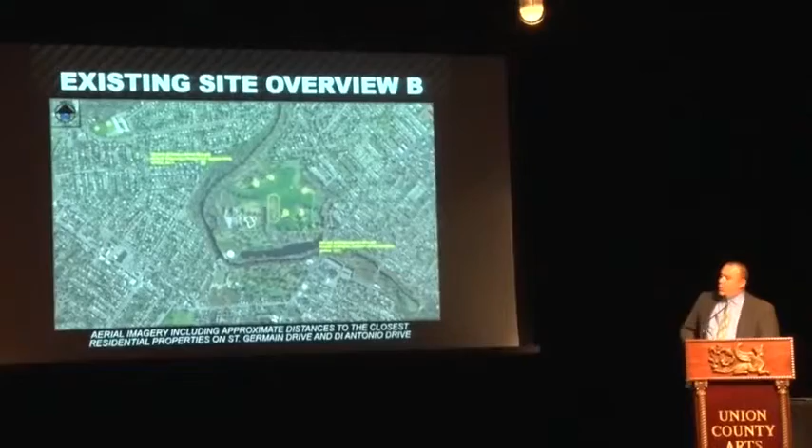Now that we have a general overview of the surroundings of the park, I'd like to take a closer look at the existing park and the amenities that we currently have at this park.

You'll see our track and field—the track is in red, or pinkish color—with the soccer field and track amenities within the interior of the field. To the north and east, we have a number of baseball and softball diamonds that are utilized. Those fields all have their associated fencing and other required measures, like backstops and fence material.

Now located to the south of our complex, we have a picnic area. To the southwest is the Walter E. Ulrich Pool, which consists of a kiddie pool, an Olympic-sized pool, and a diving pool, along with associated buildings such as the bathhouse with concessions, and the various pump houses and maintenance buildings. That particular complex is surrounded by a chain link fence.

Then to the west of our property, we have 4 tennis courts, which again are fenced in. Those tennis courts have recreation lighting so they can be utilized during evening hours, with poles 60 feet in height. To the west of the tennis courts, we also have some basketball courts.

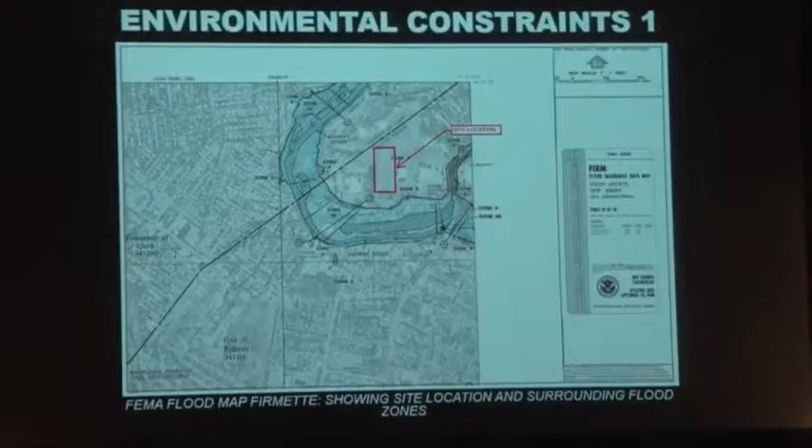One of the first items we look at is whether the site, especially in this case because we have the Rahway River, is located within a flood hazard area or flood-prone area. One of the documents the DEP has us utilize is the FEMA maps, which you'll see here. The blue shaded areas show the floodway, the flood hazard area, and all those limits. Our tract is the red box, and as you can see from this map, our site is outside of the flood hazard area.

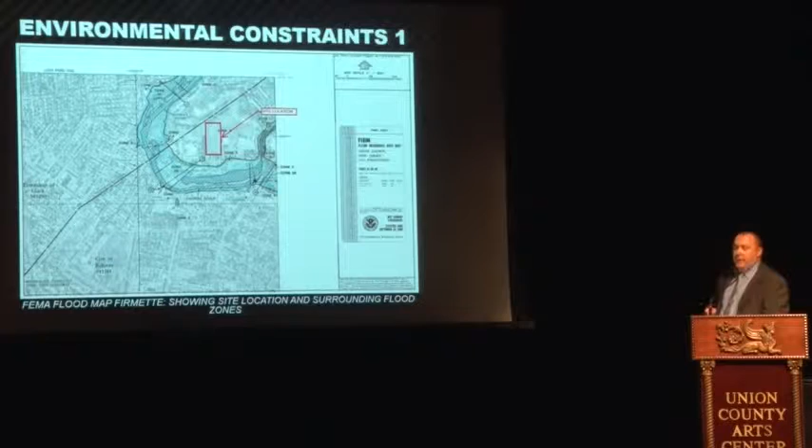Since that's the case, there are no NJDEP land use permitting requirements related to the flood hazard area for the project. So that's one element we did not need to take into consideration for our project, while there are other measures we need to look into as well.

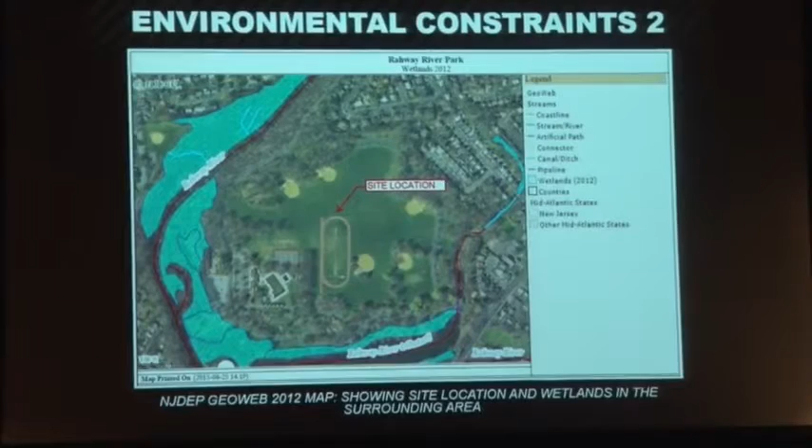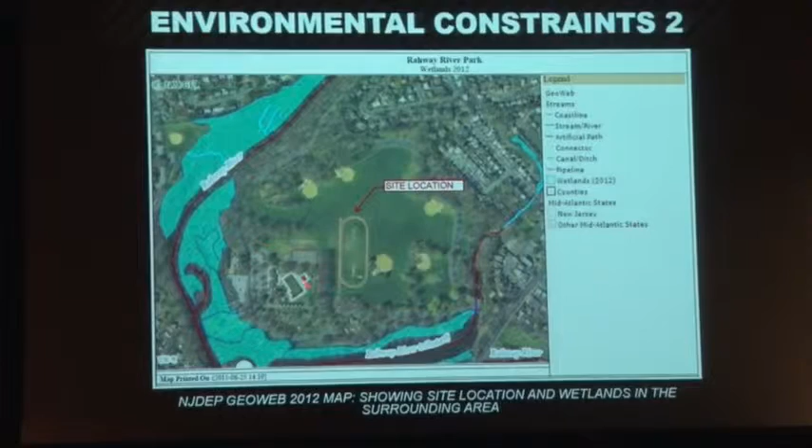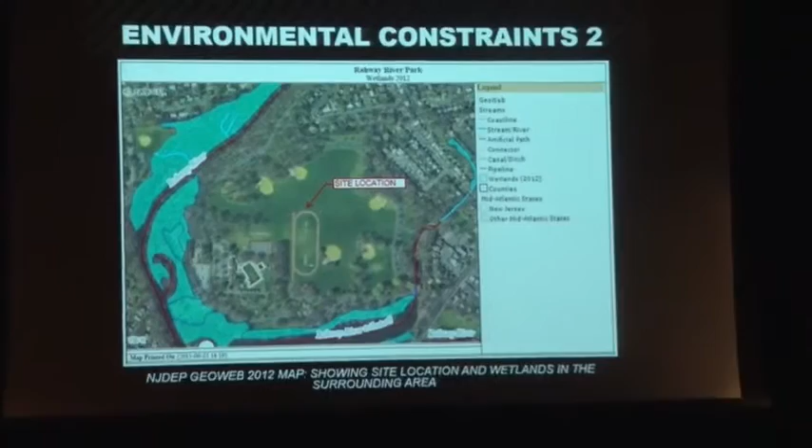The next item is related to wetlands and any associated buffers related to those wetlands. A document readily available to the public, as well as us engineers, is provided by the NJDEP, called the GeoWeb program. On that program, we're able to pick up the wetlands information, shown here in blue. Our tract is located here in the middle, and there are no wetlands associated with those particular improvements.

So again, nothing related to wetlands, so we are not required to obtain any of the wetlands permitting that would potentially be required if we were down in one of the areas near the river. As far as the site itself, we are outside the flood hazard area and also the wetlands. I'd just like to note, for the existing surroundings, the field is one of the higher locations within the park complex.

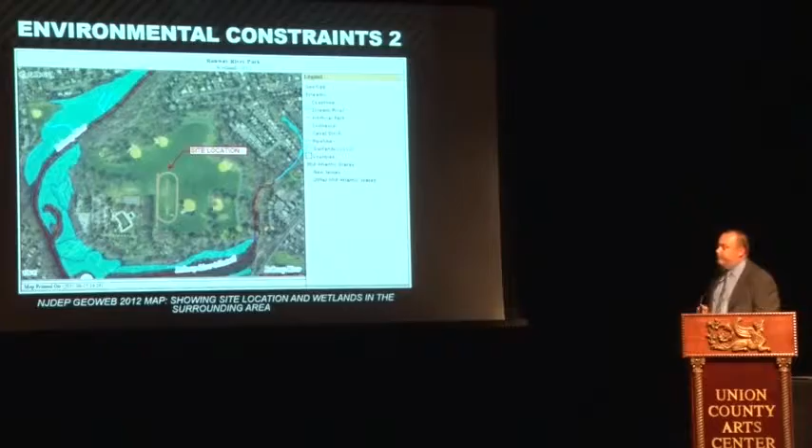Next, now that we've evaluated the environmental constraints, we've determined that there really is no NJDEP land use permitting that would be required as part of the improvements.

We've got to also take into consideration some of the site constraints related to the facility, making sure the improvements fit the need and the proper field location and orientation is met, that the uses of the fields are determined and the proper age group so the size of the fields are adequately sized, and that we provide the proper use for the county and residents so the athletic programs and recreation have what they need.

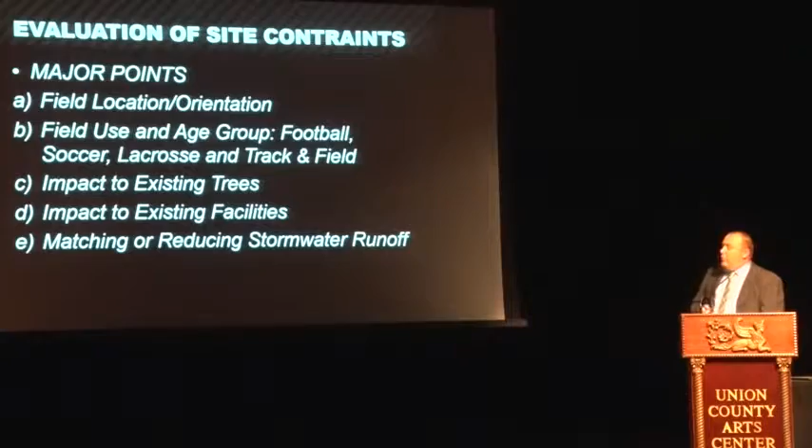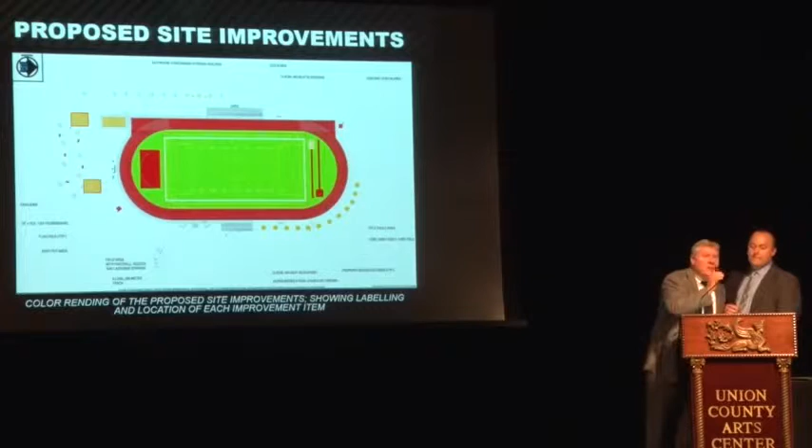So again, we had the flag poles, and your higher, taller obstructions - like I mentioned earlier, we tried to keep everything of height closer to the trees so that the impact to your sight lines was not impeded by any of the amenities and supporting structures we've incorporated for the field.

The other two items you'll see are two orange boxes - those are open-air pavilions that will serve a multi-function purpose. The first function will be as picnic areas. They'll have picnic tables so people can go in there and have their lunches and a good time at the park. During the evening hours for sporting events, it can be utilized for the teams to congregate for meetings at halftime and before the game.

In addition, we are also proposing field lighting at the complex so the fields can be utilized throughout the different times of the year. As I know in my own town, there are issues - not enough fields, not enough time to get all the practices in. So the solution is to have lighting on it.

So there are 4 proposed lights. Roughly each one is located at the 15-yard line on both sides. The proposed lighting is 70 feet high, which is the standard height for any athletic field being built. As far as the lighting, I'll get into that a bit more as I continue my presentation.

What this is illustrating is a line 200 feet away from the proposed track. The lighting levels from those lights on the field range down to significantly low levels - the average foot candle was about 0.08, a minimal amount of light, 200 feet outside the field. As I mentioned earlier, the closest residential home is 660 feet away from the proposed track improvements.

So the lighting levels, by the time you get to those residential homes, the light glare will be negligible, as shown in the image here.

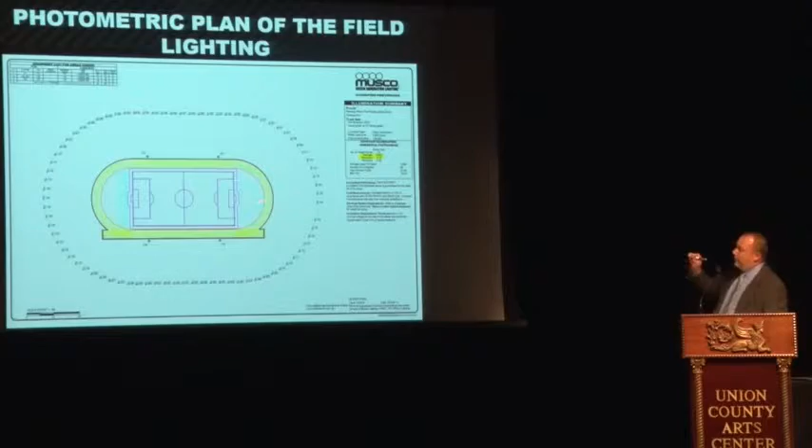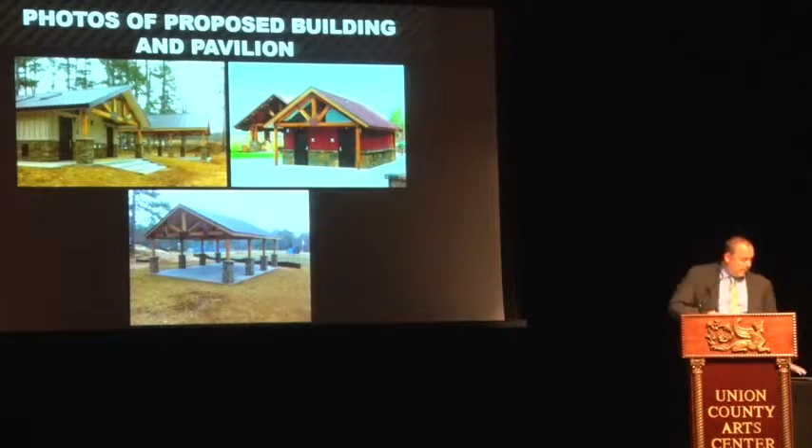All right, and again, here's the proposed improvements. We've touched on the locations. We tried to keep anything of height structure within the confines of the trees. The track location was located based on the existing footprint.

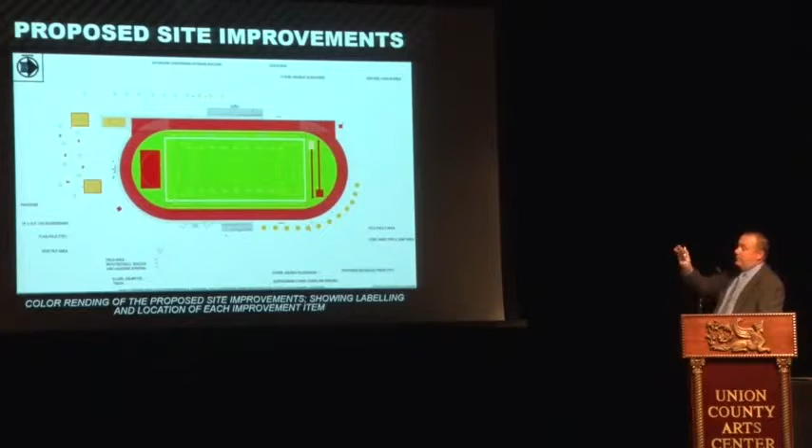The idea was to not impede upon existing baseball fields, while trying not to encroach any additional open space within the park. The bleachers and coach box were located so as not to impact any of the trees, so we didn't have to take any trees down along this nice row of oak trees along the existing asphalt path.

As well, we tried to keep all these elements within the areas of the higher developed portions of the park itself, so that we keep that open nature of the existing park.

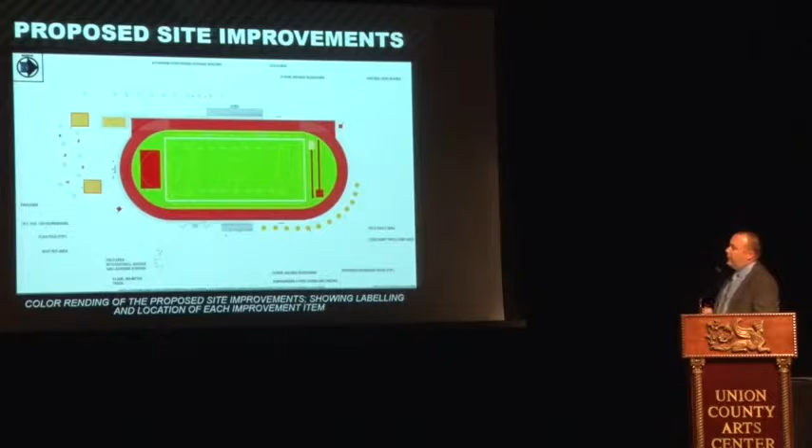And so, anyway, I'd like to thank you very much for your time and allowing me to present the proposed improvements at the Rahway River Park. Thank you very much, Dave.

Appreciate that. Now I'm going to ask our Public Safety Director, Andrew Moran, to make a few comments relative to parking issues. I'll be very brief in my comments. I know you have a lot of questions, and we want to get to the question and answer period.

But the county police, along with the Rahway Police, the city, and the Board of Education, have partnered to address any potential traffic or parking issues. The Rahway Police and the county police have a long history of collaborating and coordinating events, so from that aspect, this is not new for us.

Together, we've identified several satellite parking locations in the event additional parking is needed. The city and Board of Education are planning to coordinate a shuttle service to and from these satellite locations if they're needed.

As with all events held in a county park, our county police evaluate the proposed event, coordinate with local agencies, and develop an action plan that addresses both security and traffic concerns. Thank you.